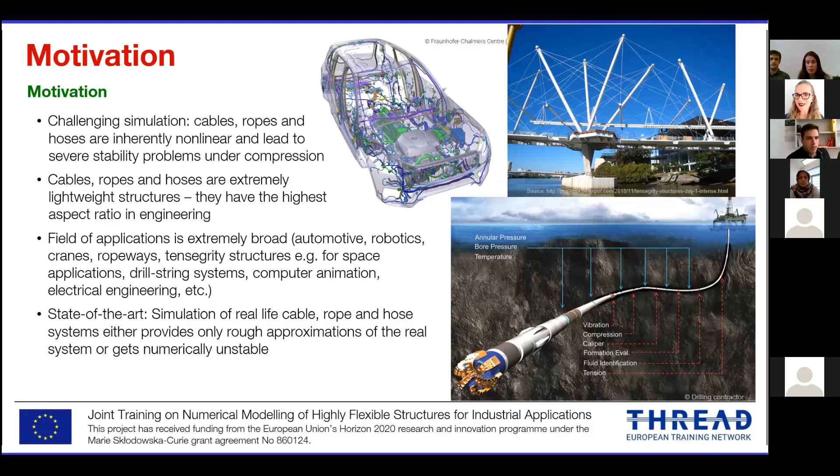Such structural elements can be found almost anywhere and have a broad field of applications: cranes, bridges, hydraulics in cars and robots, drilling systems, and on and on. They are also used to simulate ropeways in cable cars and antennas in satellites, about which we will talk today. Currently, the simulation of flexible cables, ropes, and hoses provides only an approximation of the real system, or gets numerically unstable, meaning the results are not useful.

THREAD network joins together 11 universities and one non-academic partner to collaborate on 14 different research projects. Each institution employs 1 to 2 early-stage researchers to conduct research on a certain topic and work simultaneously on their doctoral study. These projects join together into work packages with common topics to further collaboration. THREAD is funded by the European Union's Horizon 2020 Research and Innovation Program, and it is conducted in close relation to industry via several industrial partners.

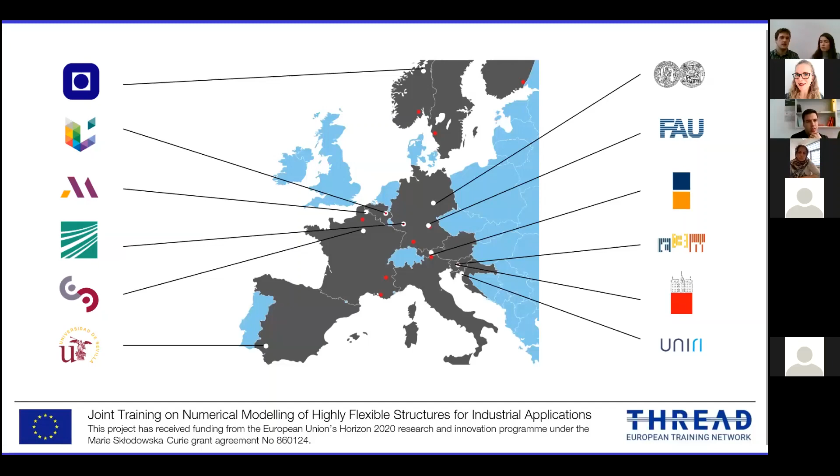Industrial partners are an integral part of THREAD and help with real-world experiences from the industry. This helps us, the researchers, gain a better understanding of the relevance of our research and how academic theories are implemented in practice. It also gives us insight into the organization and work in a company. Industrial partners, on the other hand, receive early insight into cutting-edge research, get contacts with academic partners including us, the researchers, and get a chance to define specific industrially relevant topics of research in this field.

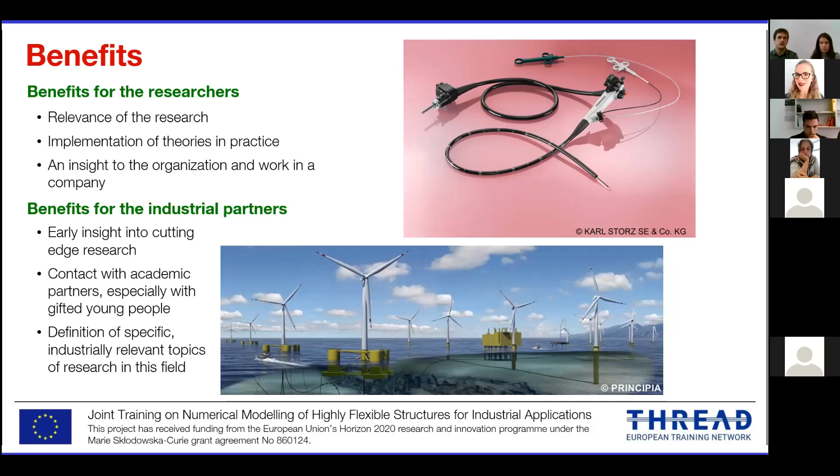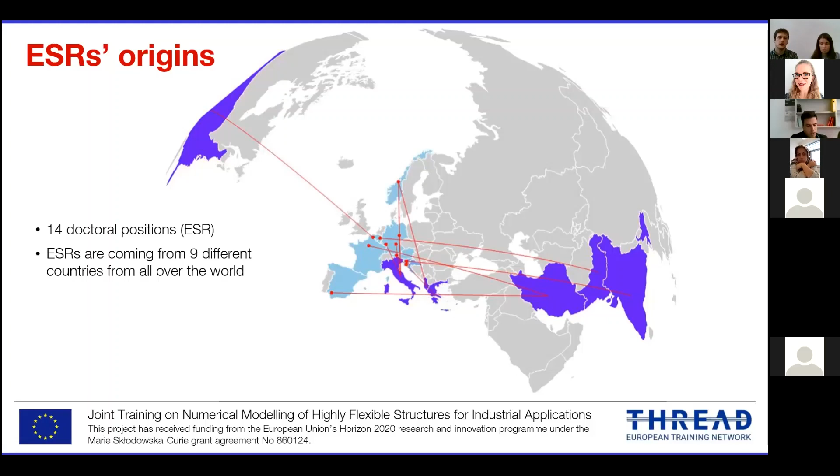There are 14 researchers in THREAD, and we come from all over the world. I am, for example, from Slovenia, while Konstantina is from Greece. Most researchers come from European countries, however we also have a few from other continents, specifically North America and Southwest Asia. On the map, you can see the origin countries in dark blue and the host countries in light blue.

The aim of the THREAD project is not only to conduct scientific research, but also to educate young researchers to become independent and successful in their future careers, either in academia or industry. Therefore, we participate in industrial and academic exchanges to further extend our knowledge on the subject. We call such exchanges secondments, and they help us meet other researchers. On the map, you can see academic institutions as red dots and industrial partners as blue dots.

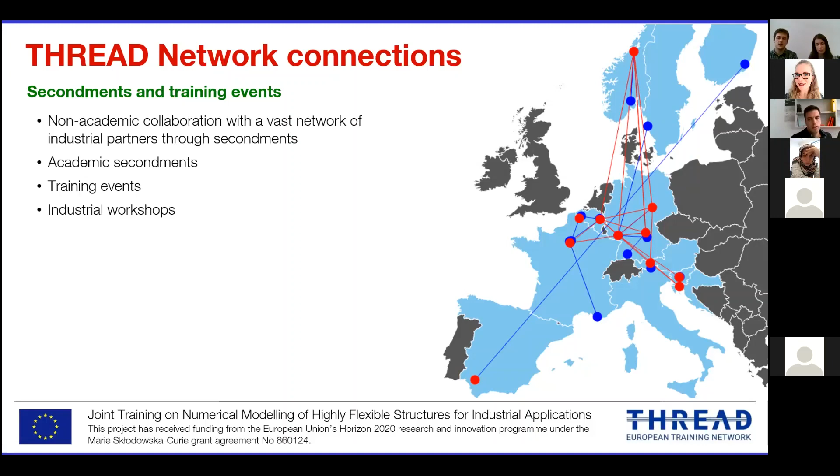Each researcher goes to one industrial secondment and usually, but not all, also go to a couple of academic secondments. Besides this, we also engage in different training events organized by the participating institutions in THREAD to develop a wide range of skills, from theoretical knowledge to soft skills like writing and presenting, and industrial workshops.

The first training events have already taken place. This summer, 2 conferences were organized. They took place online because of the corona crisis. However, active participation and direct communication were 2 common points of these events.

The first training was organized by Friedrich Alexander University. Its topic was the fundamentals of beam theory and flexible multibody dynamics. It aimed to give us basic theory in THREAD's field of research. During this event, we interacted a lot, both with the lecturers and with our colleagues. We also worked in teams trying to solve problems that were posed to us during the evenings after the lectures.

The second network-wide training event was organized by the University of Ljubljana. Its title was Learning about Scientific Writing and Communication Skills. We were given a lot of useful tips about writing strong scientific articles in English. It was emphasized that composing a good text depends on the language you're writing in. So, as we come from different countries all over the world, some guidance on how to efficiently use the English language was very useful. We also took pieces of advice about speaking in public with confidence. Most importantly, we had the opportunity to meet and get to know each other.

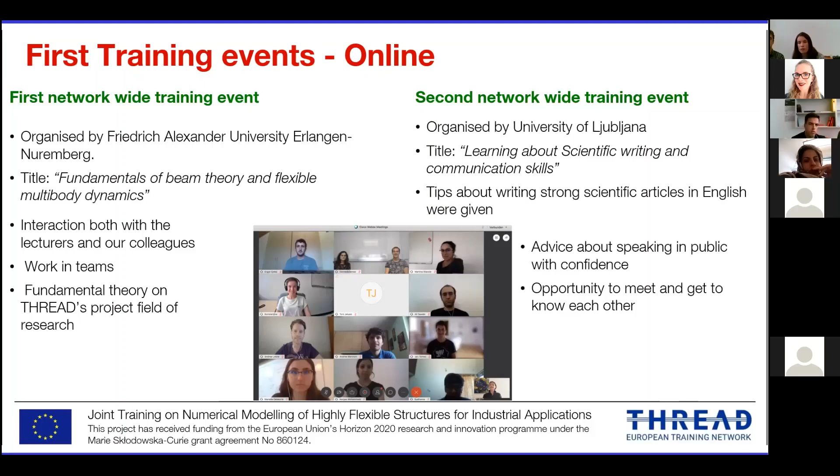The first real-life training event took place in Austria in the first week of September. We finally had the opportunity, most of us, to meet in person. It was also covered online for participants who were not able to come.

We all had the chance to attend a sequence of scientific lectures regarding the choice of coordinate formulation for the modeling of ropeway systems. Advanced numerical methods and simulation techniques were presented. Fundamentals in the mathematics of Lie group theory were also shown.

In addition, a challenge was posed to us for which we had to collaborate and make a presentation at the end of the week. Of course, we didn't lose the opportunity to explore the surroundings and do some hiking in the mountains.

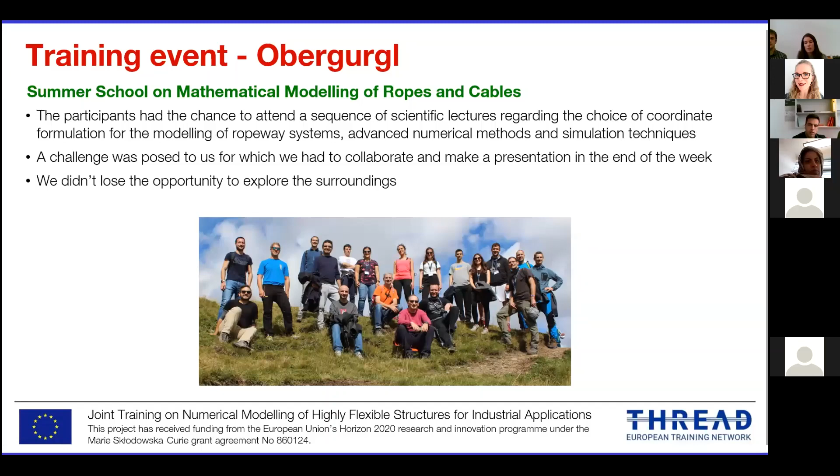I'm working at the University of Innsbruck under the supervision of Professor Johannes Gerstmayr. Our industrial partner is an Italian company, Leitner. Leitner is one of the biggest manufacturers of ropeway systems.

I'm going to work there for 3 months during my employment. I expect to gain experience working in an industrial environment and to see the real-world application of the theory I am studying. I will also spend a month at the Mathematical Research Institute Fraunhofer ITWM in Germany, and finally I will work for 1 month at the Martin Luther University Halle-Wittenberg, also in Germany.

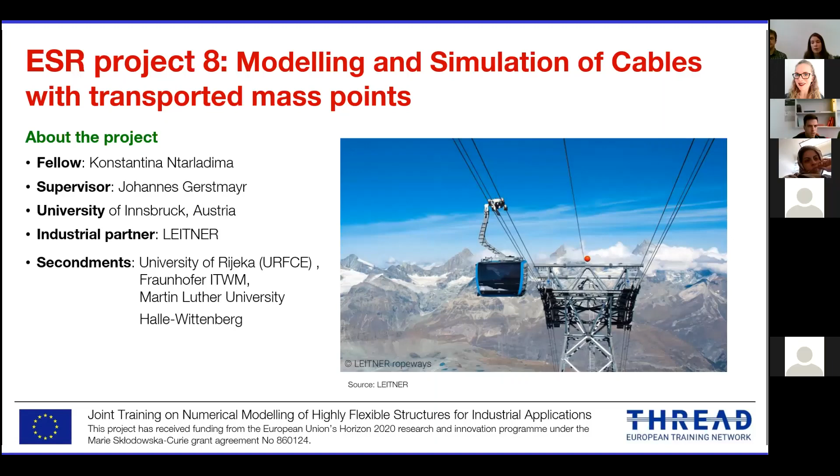Modeling and simulation of ropeway systems can be of important essence for multiple industrial applications. Specifically, cable cars and lifts equip every ski resort and are incidental to experiencing every winter sport. Industry related to the production of this construction continuously works on improving the quality, technology, and design of ropeway systems.

Sometimes cable cars are also used in cities. They are used by the general public, for example elderly people. This is why the ride needs to be very smooth. To be more specific, the oscillation needs to be kept small so that people accept such transportation systems. The same is true for ski resorts, perhaps to a little smaller extent.

Different types of cable cars and chairlifts exist to make the passenger experience both entertaining and safe. However, to design these systems appropriately, we need a lot of research. The mathematical modeling of such slender structures requires the implementation of a sequence of methodologies and computational tools.

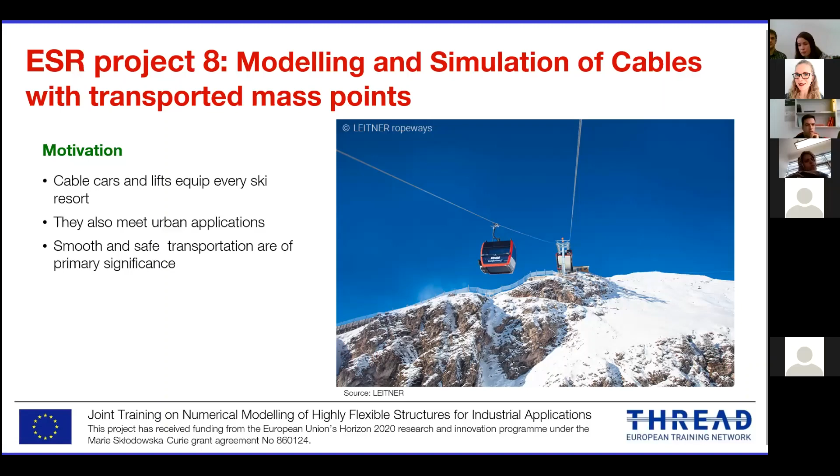My research topic focuses on modeling and simulation of cables with transported mass points. In the case of my industrial application, the transported masses are the vehicles moving along the cables in ropeway systems. The main goal is to develop an efficient model for simulating such a system, taking into account its geometry and properties. The contact with the sheaves also needs to be modeled.

Another goal is to contribute to the development of an open source code. The coding should be organized in such a way as to be handleable and useful for modeling different flexible and slender structures. As far as our current approach is concerned, we use beam finite elements to simulate a rope.

The types of beam elements that can be used for this are the geometrically exact beam element and the absolute nodal coordinate formulation. The former was initially implemented by Simo and Vu-Quoc in 1986. This type is chosen because it is comparatively simple. Two nodes are used for each element, which are interpolated linearly.

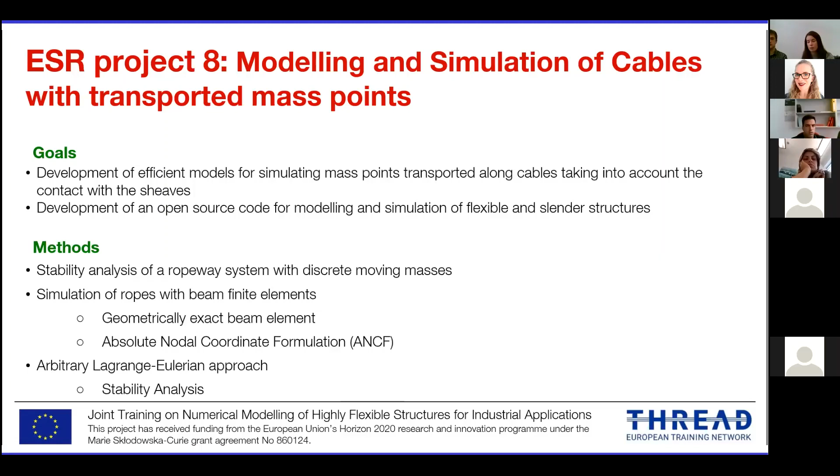On the other hand, the absolute nodal coordinate formulation is already used for modeling a ropeway system, as it is convenient for thin structures. Two nodes are used again for each element, but the interpolation takes place with third-order polynomials. Absolute nodal coordinate formulation is convenient for problems where there are large deformations, such as thin cables and ropes.

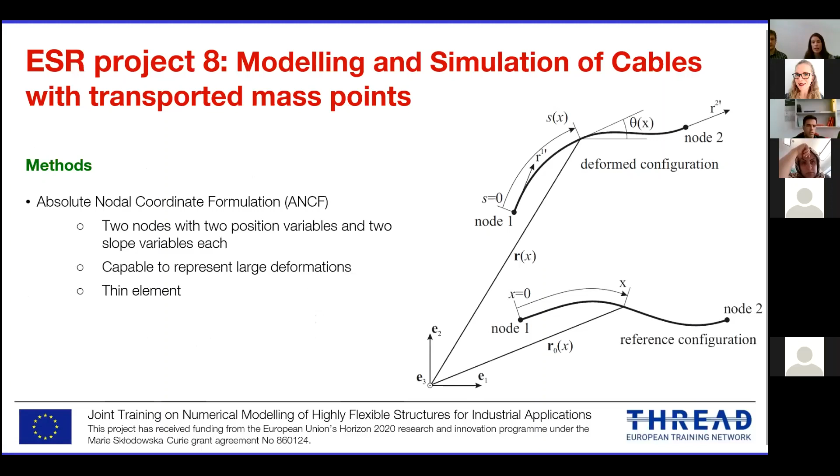The studied structure can be approached either... Sorry, I have a simulation here. Just a second to set up the simulation.

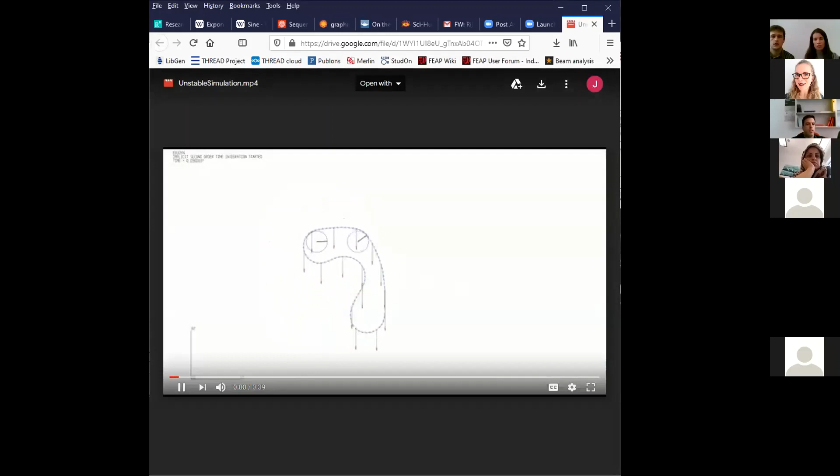Okay, so you can see now the simulation. I hope that now you are able to see it.

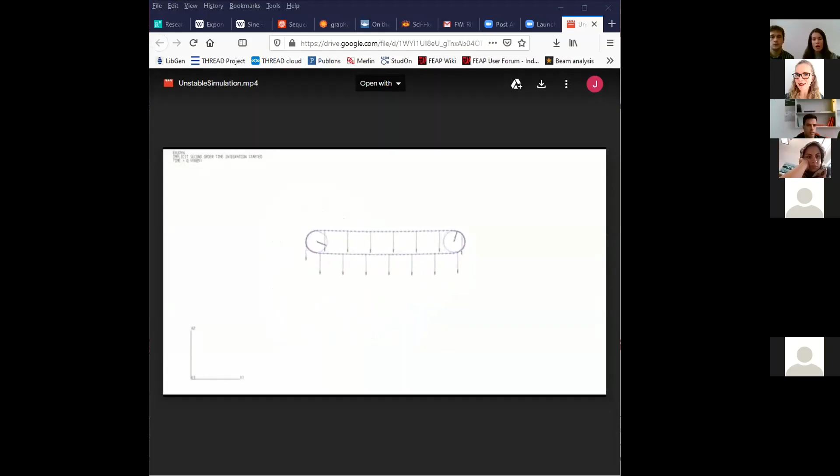The studied structure, as I said, can be approached either as a continuous moving mass or as discrete masses that are moving along the cable. In the second case, the movement of discrete masses can cause instability.

On the left of the slide, we can see the simulation of a moving belt with transported mass points. Watching this behavior for increasing axial velocity, we observe that oscillations get very large and we have resonance.

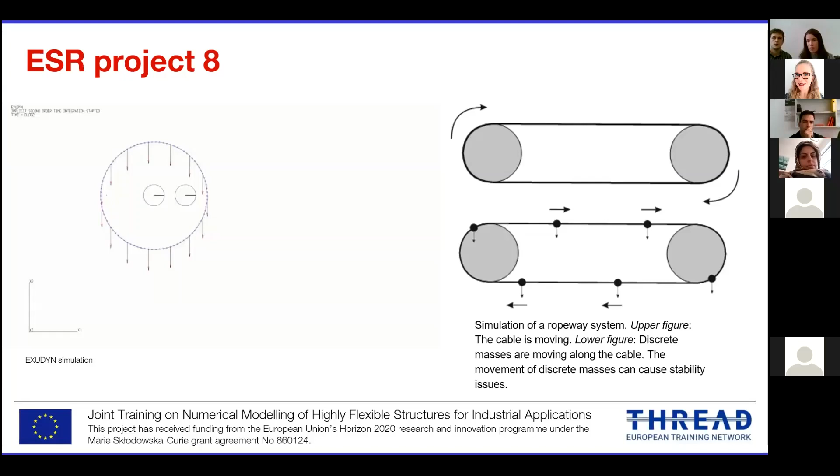It is evident that a fine finite element mesh is needed at the points where the rope is in contact with the sheaves, while larger finite elements can be used in the free span.

To deal with that issue, we use the so-called arbitrary Lagrangian-Eulerian approach. Using this approach, we assume that the considered beam finite elements do not move along the strip axis during the simulation, but keep a fixed undeformed configuration in time.

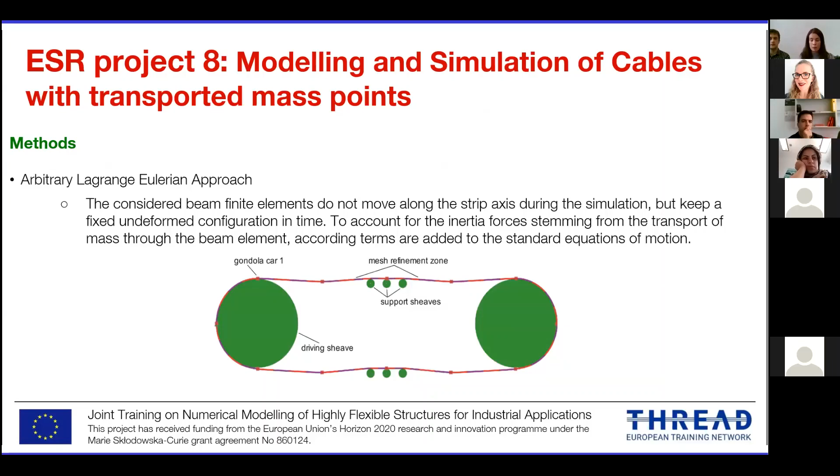The geometrical description of the used finite elements is purely based on displacement and does not use rotational coordinates for the cross-section. An element with 2 nodes is associated to 8 generalized coordinates.

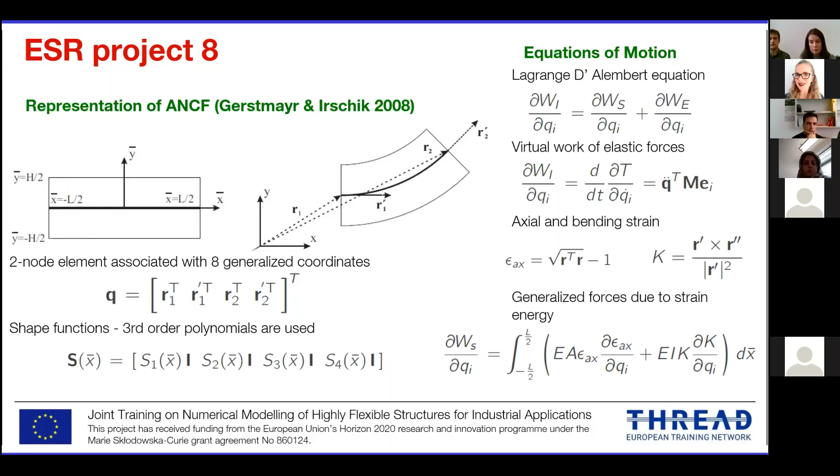The already described element can be extended to the case of an impressed constant axial velocity. This way, an axially moving beam is modeled by elements which do not travel at the impressed axial velocity, but keep their axial position relative to this velocity.

The Lagrangian reference configuration of such an element is then moving through the strip in negative direction at the prescribed velocity. The velocity of a point on the beam axis is given by the derivative of the position vector defined in the Lagrangian reference configuration.

One can note that the velocity vector does not only depend on the time derivative of position, but also on the spatial derivative of position.

Although the formulas look complicated, what is important to point out here is that if we consider the additional inertia forces and do the appropriate substitution in the equation of motion, the absolute nodal coordinate formulation beam element can be extended for an axially moving rope.

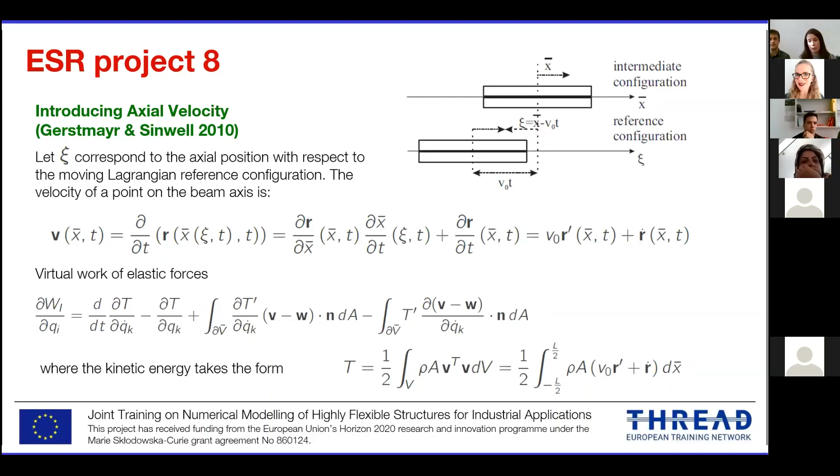Programming occurs in an already existing software, Exudyn. Exudyn is developed at the University of Innsbruck. Most of the code is written by my supervisor, Professor Johannes Gerstmayr. It is a C++-based Python library, which means that the user has the possibility to call existing commands in order to set up his system.

It is useful for modeling flexible multi-body dynamical systems. Multi-body systems are systems composed of various rigid and flexible bodies. Exudyn offers the possibility for the user to easily set up systems composed of rigid and flexible parts, loads, and other components.

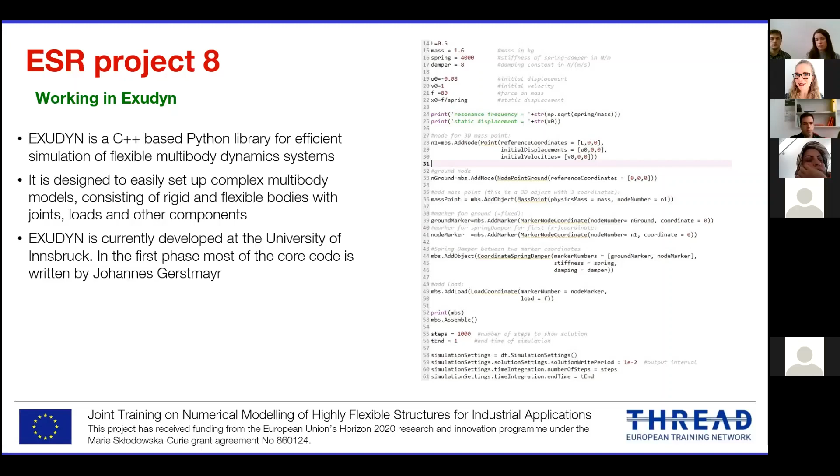Hi again. I'm stationed in Rijeka at the Faculty of Civil Engineering under the supervision of Professor Gordan Jelenic.

My project has this title: Stable Long-Term Numerical Integration of the Cosserat Rod Problem in Large Overall Motion. To explain briefly the meaning of my topic, numerical integration is a tool we use to see the evolution of objects' movement in time. Here the object in question is a beam or a rod.

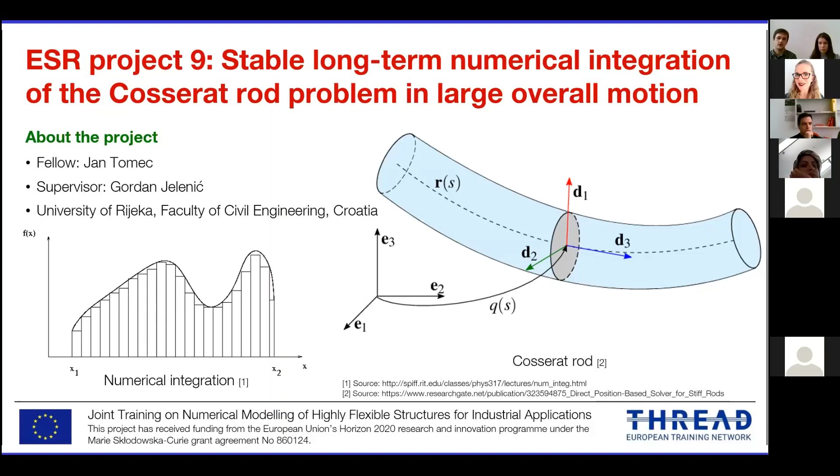Its geometry is explained with the Cosserat rod theory, where we use for description the position of the center line and the rotation of the cross-section.

The motivation for my project comes from space technology. As there are more and more small and medium-sized satellites orbiting the Earth, it is the trend today to send multiple payloads at once with a single rocket.

On the scheme, you can see an exploded view of the European Space Agency rocket Vega. And here... oh, this doesn't work. Okay, so maybe like this, yes. Here you can see the payload module.

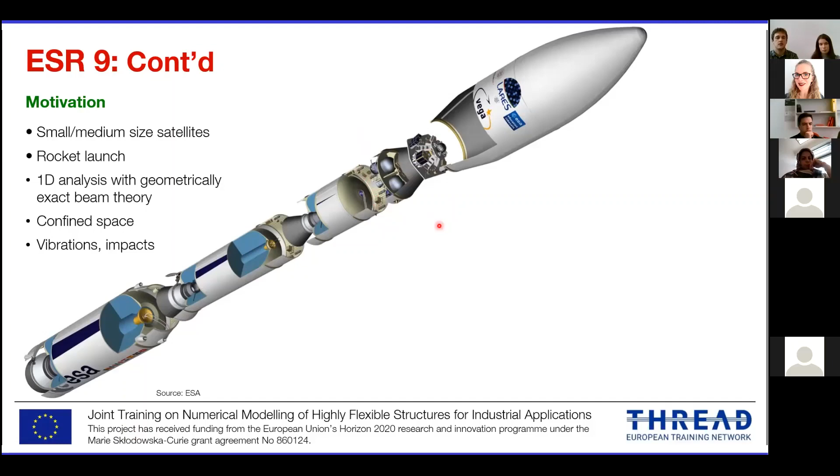This is the same payload module that actually carries the satellites, and you can see this is the entire capsule, and this is the module with satellites. You can see how cluttered the space is, and you can imagine that it is convenient to make satellites smaller to save space.

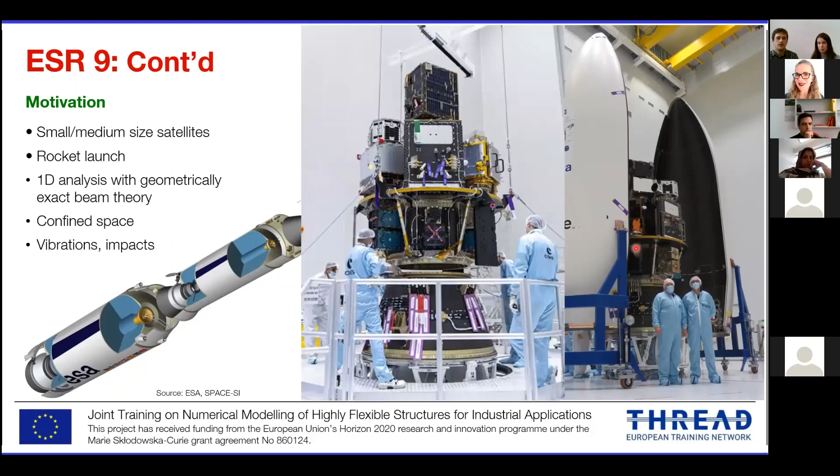This is the same module without the capsule, and here is a satellite from the company where I will attend my secondment, NEMO HD. It was sent to space a few months ago. This company is also a part of THREAD.

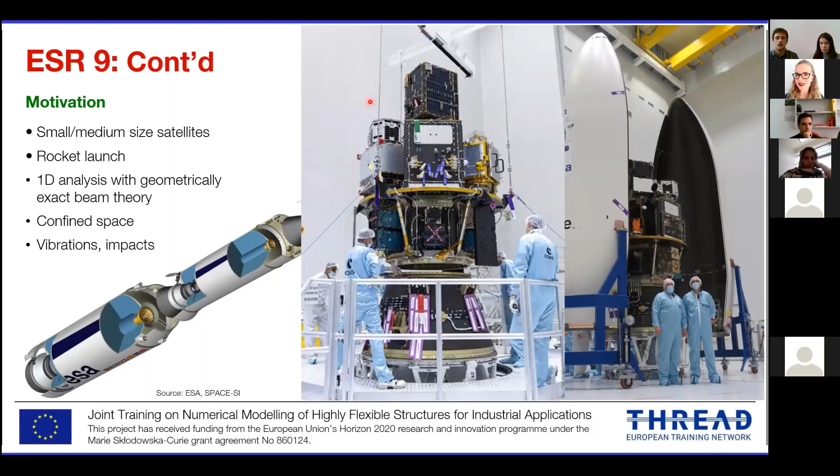And here you can see an enlarged image. It is already mounted to the payload module of the rocket. And here you can see the backside of the satellite, and you can see these antennas.

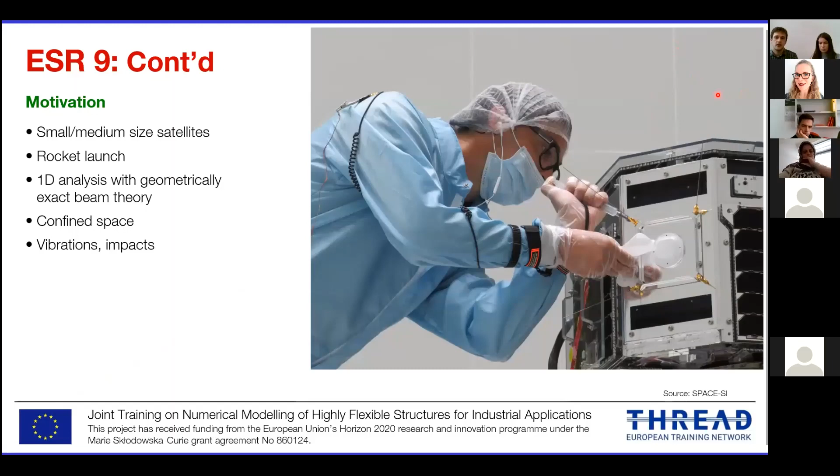And the idea is to save space by bending these protruding antennas. However, this requires careful dynamic analysis to avoid any damage during the launch due to the high frequency vibrations and impacts with the surrounding objects.

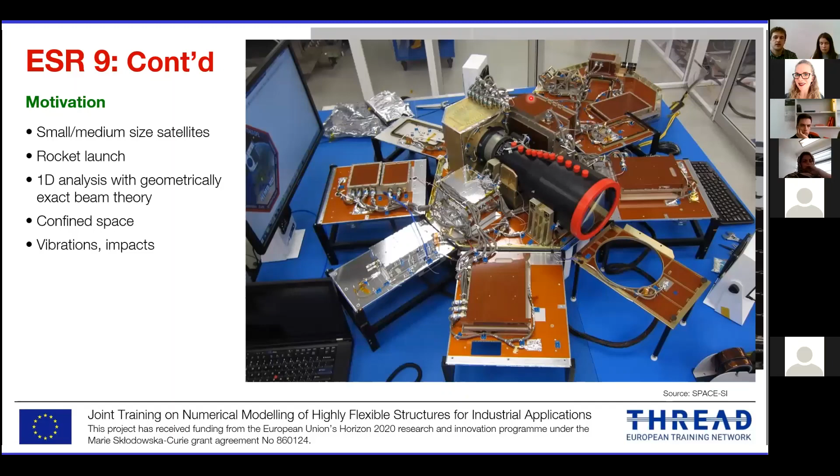On this picture, you can see the inside of the satellite. The majority of the space is taken by this camera, while the rest is electronics. It also needs to be carefully designed to withstand the extreme loading scenarios during the launch. However, this might be a subject of a later research.

In the next 3 to 4 slides, I will dive a little deeper into the theory.

Generally in mechanics, we have two sources of nonlinearity: material, arising from the properties of the materials used in the application, and geometrical, which becomes evident in applications where we deal with large deformations of a structure. Today we will focus on the latter, particularly on geometrically exact beam theory.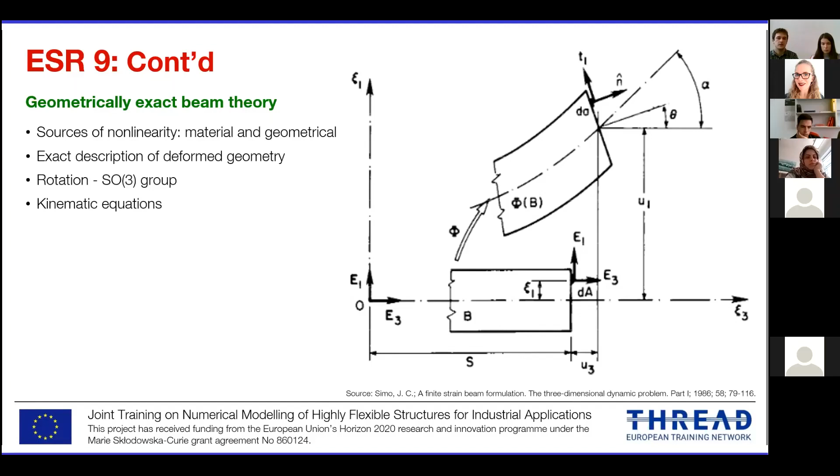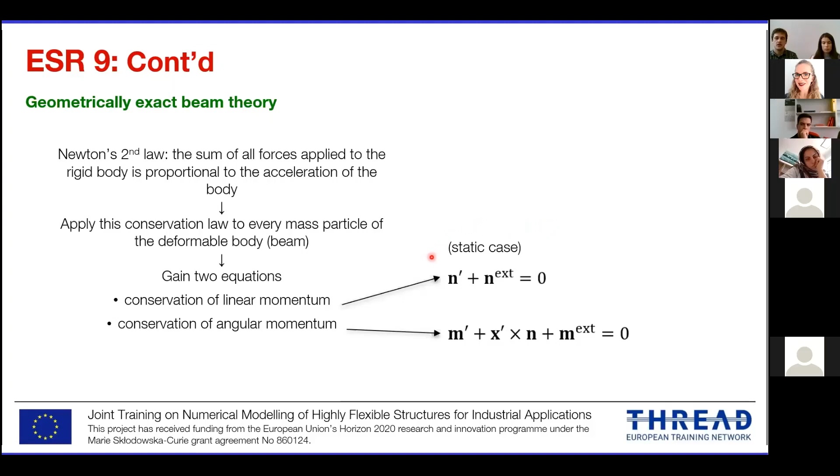However, this is only the first part in the mechanical analysis of a beam. Now we need to explain how the object moves due to the forces acting on it. Here we resort to the more than 300-year-old Newton's laws of motion, which state that the sum of all forces applied to a rigid body is proportional to the mass and acceleration of that body. A beam, however, is a flexible structure, which requires us to apply this theory to every material particle in it. We gain two equations: one for conservation of linear momentum and one for conservation of angular momentum.

In the final step, we join these balance equations with the kinematic equations via the constitutive relationship. This is a relation between stress and strain, or forces and deformation, if we simplify. It is a material property, and in my research I use the simplest possible material model, which uses only two material parameters and connects the forces to deformations linearly. This is true for materials like steel.

When we join all these equations together with a mathematical tool called the variational principle, we gain a finite element. When we analyze a structure, we divide it into a whole mesh of such elements. An example is on the picture, where you can see a straight beam divided into 4 elements. Finally, we have to introduce boundary conditions like displacements, supports, and forces, and then solve the system using another mathematical tool, an iterative solver like the Newton-Raphson method.

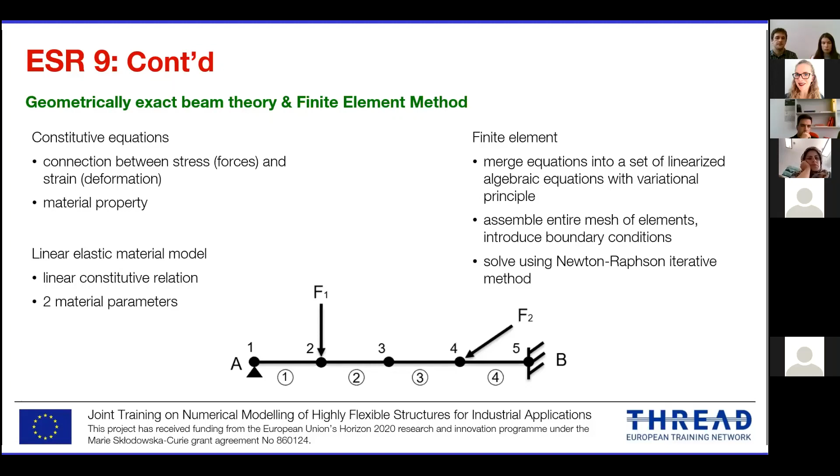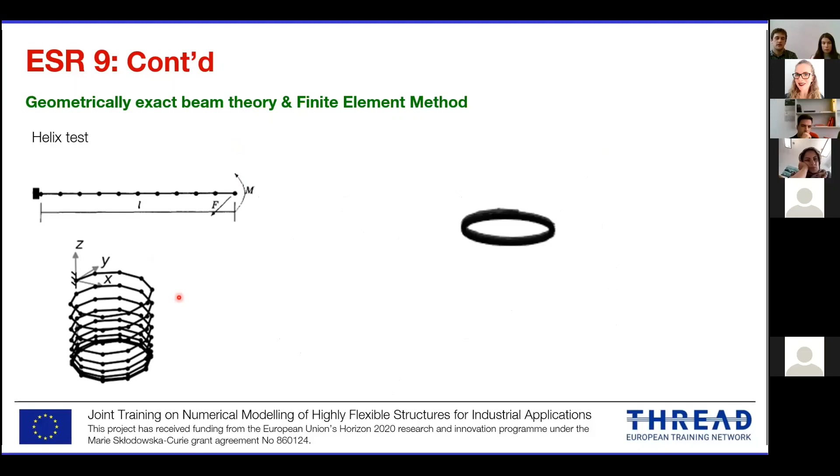When I coded all this theory, I created a software that can numerically analyze beam structures. An example is now presented to you: a straight cantilever beam. Here you can see it, loaded with a force and a bending moment. On the bottom picture, you can see how it rolls into a helix. And in this animation, you can see the evolution of the solution of the system through time.

In the second example, there is a right-angle frame loaded with two oppositely oriented moments, here and here, in the supports. This represents a stability problem because when we apply a large enough bending moment, the stability collapses and it bends in this way, as you can see in the animation.

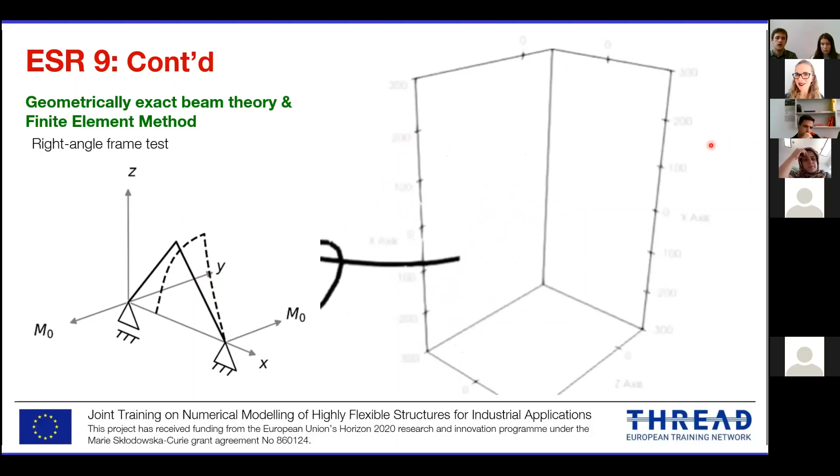Finally, the goal of my project is to develop higher order interpolation and not limit ourselves to two-node elements. We will investigate different conservative time integration techniques for dynamic analysis. They have to be capable of accounting for high-frequency vibrations and large overall motion. We will study the effect of unilateral boundary conditions, and we also want to validate our model with experiments.

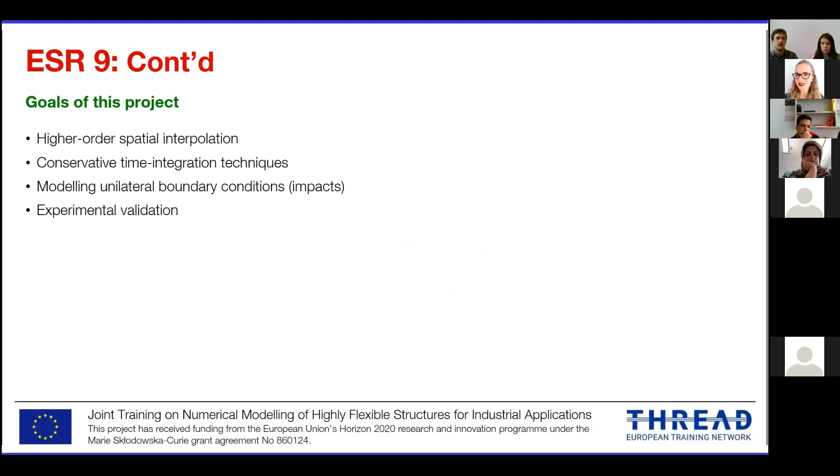This was our presentation. We thank you for your attention.